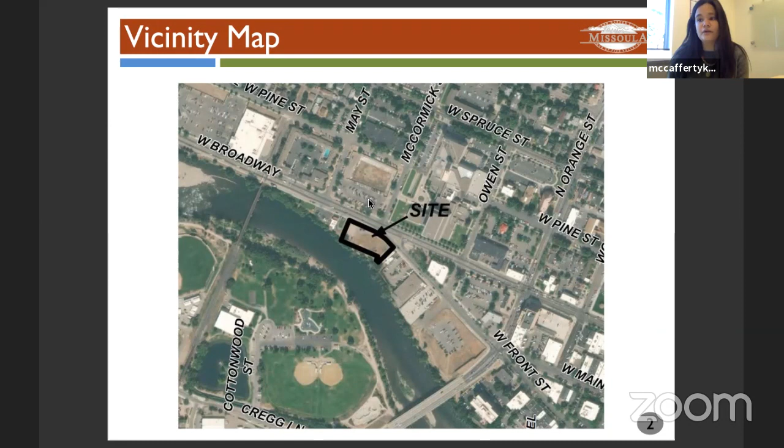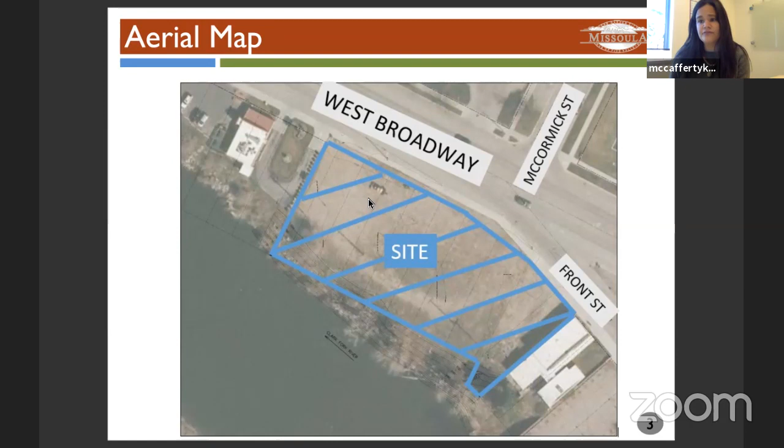Here's the location of the two parcels on West Broadway, right at the fork of West Front and West Broadway. Here's a closer aerial of the subject parcel. The property fronts West Broadway and Front Street, as well as the Clark Fork River.

This is the current zoning map. As you can see, this is the last parcel left in the Riverfront Triangle Special Zoning District. The properties adjacent to the east were rezoned from Riverfront Triangle Special District to CBD 4 Central Business District and OP1 Open Space in 2017. To the north and west of the parcel are properties zoned C1-4, neighborhood commercial, and to the south is the river and the riverfront.

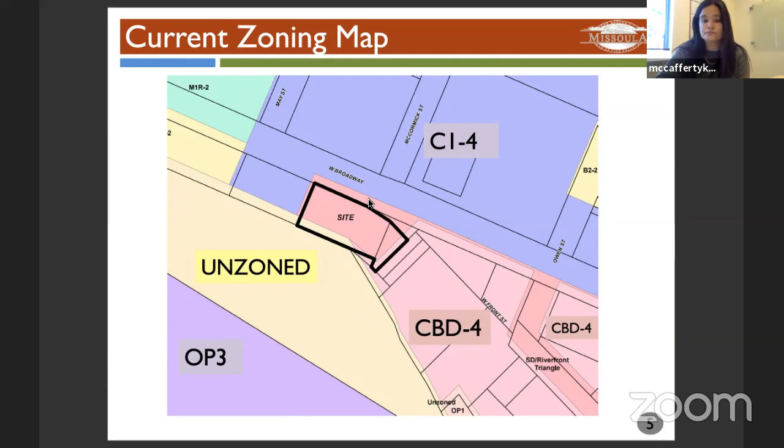The 2019 master plan brings up another aspect of this project, which is the riverfront trail easement. This downtown master plan describes the Clark Fork River in Missoula as a defining feature and recommends an extension of the riverfront trail along the north bank of the Clark Fork River and open space along the river, including the southern frontage of this subject parcel, shown on this map in this orangey brown color.

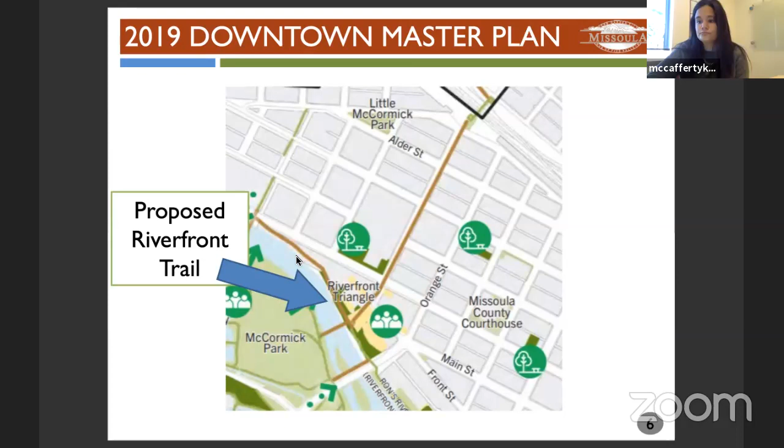This is the North Riverside Parks and Trails map. As you can see, this map also highlights a potential multi-use trail along the riverside of the subject parcel, shown in the dashed red.

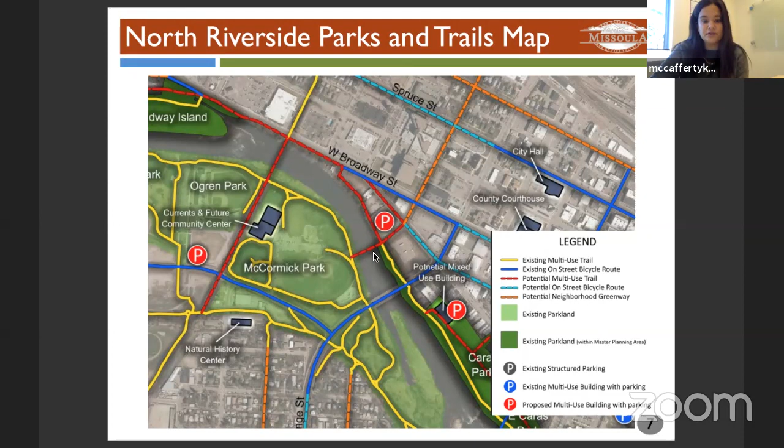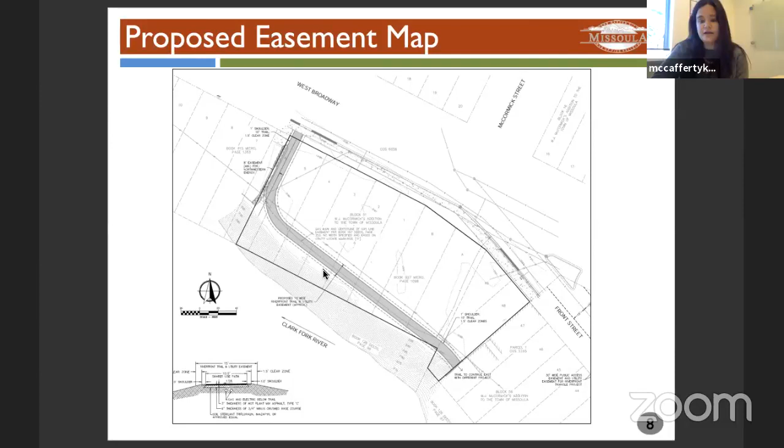The applicant's submittal packet for the rezone includes a 15-foot wide public trail easement across the subject property, shown in this gray area. It is shown running east to west, connecting to sidewalks on West Broadway at the western edge of the property. This is what the slide is showing, just this easement is proposed.

In regards to the Riverfront Trail, staff is recommending that the applicant and the City of Missoula enter into a development agreement to cover the dedication and width of the easement, as well as the construction and management of the trail. The proposed development agreement would address the following points.

First, include a 20-foot wide public non-motorized access easement filed with the development agreement. It would include construction of the Riverfront Trail along the north shore of the Clark Fork River from east to west, without interruption or detour, connecting to West Broadway on the west end.

It would state the developer's responsibility for the cost of a minimum 10-foot wide asphalt trail, and state the City of Missoula's responsibility for the cost of upsizing the trail to a 14-foot wide concrete trail, as well as repair, maintenance, and replacement.

The design of the Riverfront Trail and any variation from the standards, including easement width, surface width of the trail, lighting, provisions for trash and benches, shall be specific to the site and approved by City Parks and Rec. Finally, the development agreement shall be reviewed by City Parks, Missoula Redevelopment Agency, and Development Services, and approved by City Council.

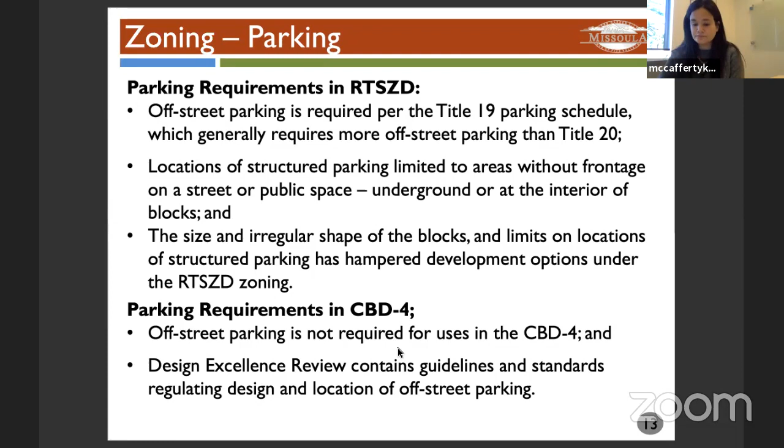In general, CBD4 Central Business District with the outer core design excellence downtown overlay zoning code provides a wider variety of commercial uses without the prescriptive requirements of the current zone. It provides a mix of permitted residential and non-residential uses, similar to the Riverfront Triangle Special Zoning District. CBD4 has an increased height to 125 feet with a step back of 10 feet above 85 feet at the street edge, compared to a maximum building height of 52 feet in the current zoning.

A 50-foot setback from the 100-year floodplain is in CBD4, however there's no requirement to extend the Riverfront Trail within the setback area, whereas in the current zoning a 50-foot setback from the top of the riverbank is required, and extension of the Riverfront Trail within the setback area is also required. Finally, there's no off-street parking requirement in CBD4, compared to the current special zoning district, which requires parking per Title 19.

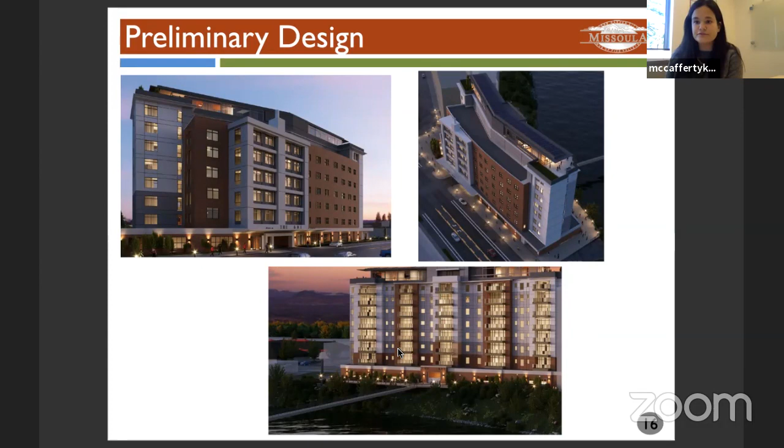Because the growth policy recommends CBD4 as a relatable zoning district for lands with this urban center land use designation. Also, the motion requiring dedication of a trail easement and development agreement are accommodating to the 2019 downtown master plan.

Public services and transportation is next. The rezoning is in an area served by public water, sewer, sidewalks, public transit, and public roads. The motion requiring the dedication of an easement and development agreement for the extension of the Riverfront Trail enhances non-motorized facilities.

Next is compatible urban growth. The rezone and easement will facilitate mixed-use development in the urban center. Next, promotes public health and safety. CBD4, the proposed zoning code, has a 50-foot setback for structures from the 100-year floodplain. And the motion requires dedication of an easement and development agreement to provide an extension of the Riverfront Trail.

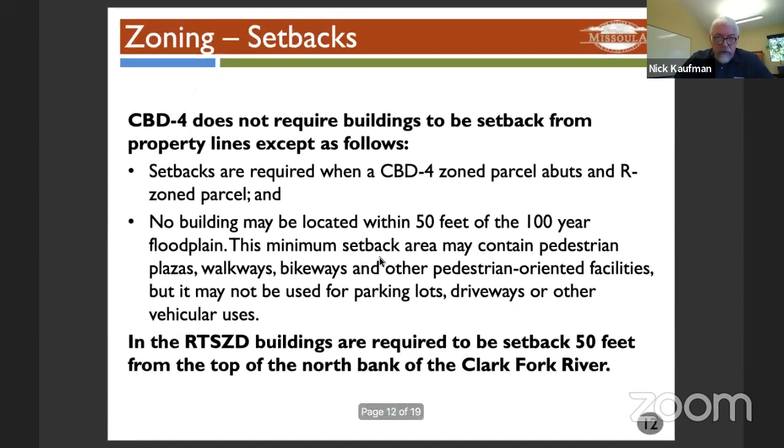Yep, I can make that change before the council presentation on the 14th. Sound good? The slide presentation does have some pretty nice renderings of what's proposed for the site, and it also shows the ground floor parking that we're going to provide.

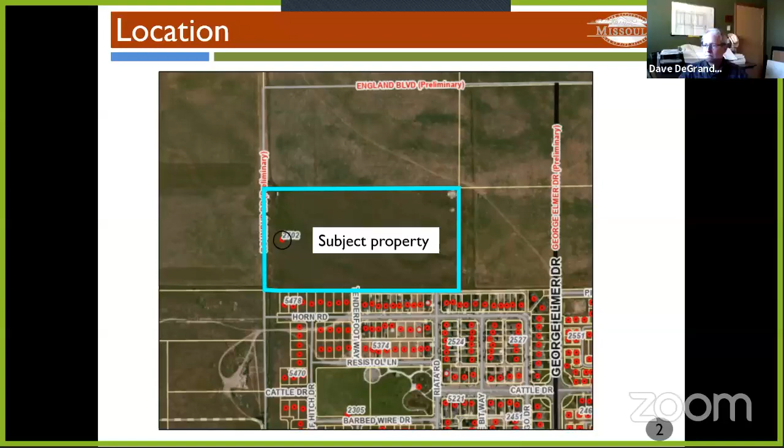Surrounding this parcel to the west is airport-owned land used for agriculture. To the north, agricultural land, and to the east, agricultural land as well, though to the east we are in the process of reviewing a subdivision application intended for multifamily and mixed-use type development. This is a rapidly growing area. The parcel has historically been used for agriculture, but according to the applicant it has been fallow for several years. It's adjacent to city limits on both the south and west side.

The parcel is located within Annexation Area A. According to the City of Missoula Annexation Policy, Annexation Area A is an area where the annexation policy guidelines are largely met. So this is an area where the city has indicated annexation will be strongly considered.

Currently, the property is zoned in the county as CRR1 rural residential. That's a not particularly dense rural residential zoning district, with 1 dwelling unit per acre as the maximum density. The proposed annexation includes a request for RT 5.4 residential, a zoning district that allows single dwelling and 2 unit dwellings.

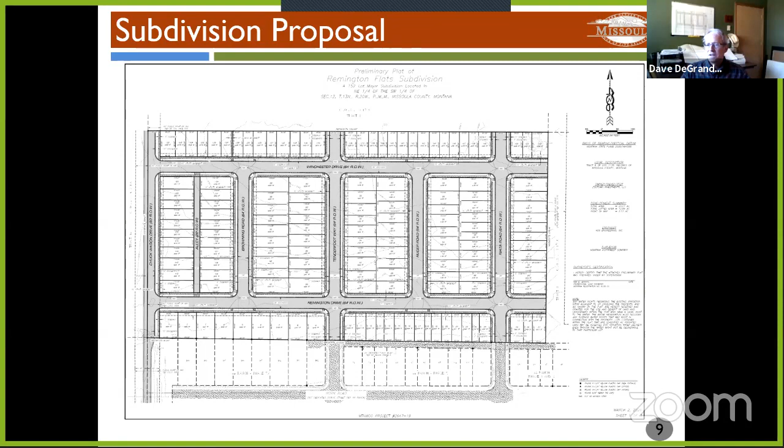There's one peculiarity that stands out in my mind about this property, in the lower left-hand corner, the southwest corner of this project. You can see in red, that's Chuck Wagon Drive. Along the 44 Ranch subdivision to the south, it actually stops about 1,000 feet short of this property. So the developer is proposing to build a temporary type road, or a portion of the roadway, and have 44 Ranch and other developers extend it. There will be contributions made by multiple developers to bring Chuck Wagon Drive up to city standards to the property.

The other peculiarity with regard to Chuck Wagon Drive is it's shown here on the western side as Roundup Drive, but it's the same thing along this property. This is a certificate of survey where the roadways for Roundup or Chuck Wagon, and also George Elmer on the east, were shown for the first time, I think, on a filed certificate of survey. They established, as you might recall from the Heron's Landing subdivision, 80-foot rights of way, so these are publicly dedicated right of way.

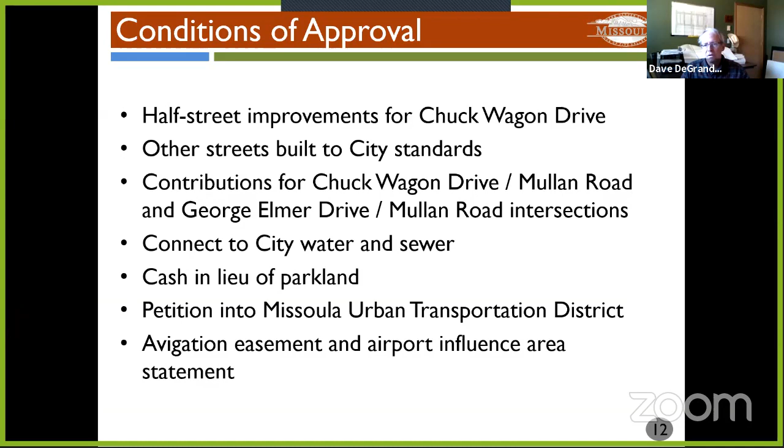What we're recommending for mitigation is that an avigation easement be provided to the airport authority. This essentially provides legal protection for future residents, alerting them that they're under a potential future airport runway, and that there will be noise they need to think about when designing and building their house. Those are the main conditions of approval, along with several other more standard ones.

Now back to the annexation and initial zoning. Montana law and City of Missoula Title 20 have certain criteria for annexations and applying initial zoning. For zoning, there are three main criteria, and it's either-or—the applicant only has to meet one. The first is that the zoning would authorize land uses comparable to those authorized under the current county zoning classification. I'd argue that's the case here: currently county zoning allows single dwelling residential development, and this zoning would allow single dwelling as well as 2 and 3 family residential development. I'd call it pretty comparable.

The second criterion is that the zoning would authorize land uses consistent with those approved by the county commissioners or board of adjustment. Again, I think that's met—we're going from county residential to city residential, which isn't too much different, just at a higher density.

Third, the new zoning must be consistent with the land use and zoning recommendations in the growth policy. As shown on the growth policy map earlier, this zoning would be consistent because it allows residential land use at an urban scale. The growth policy map mentions 3 to 11 dwelling units per acre, and the density proposed here is 7.6, which falls squarely in the middle of that designation. So it complies with the growth policy.

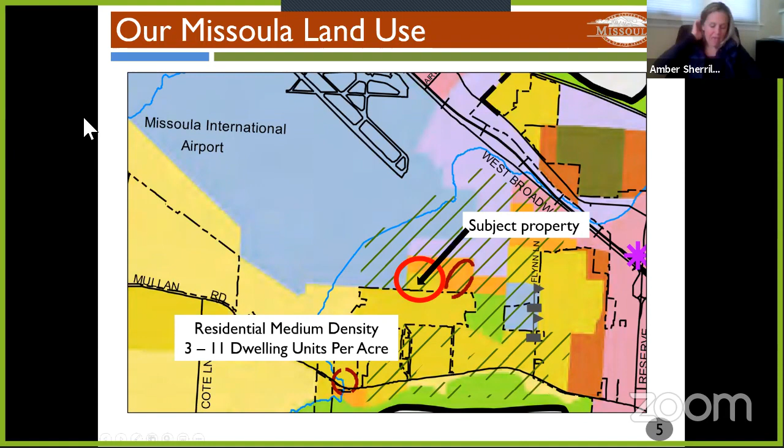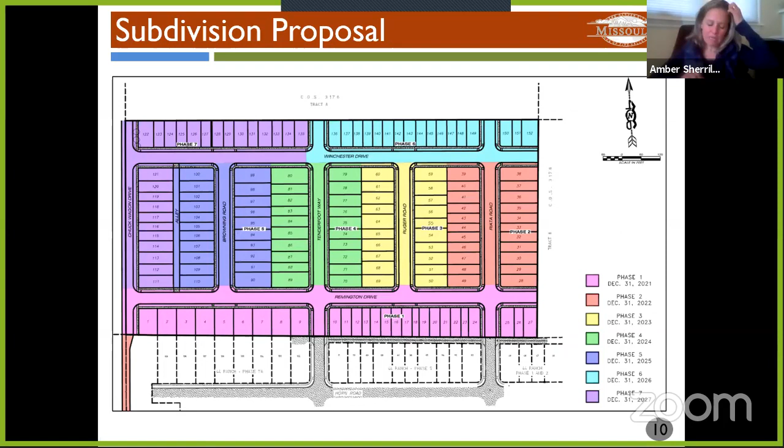And also, will you go back to the slide around the half street improvements? I don't completely understand that, I would love to understand that a little more. And then my question, as it relates to being part of the Mullan area master plan, is how does that work with through streets? I'm just worried about them all coming together, since this is happening at a time we're also trying to get that plan done. I don't even understand the half street thing.

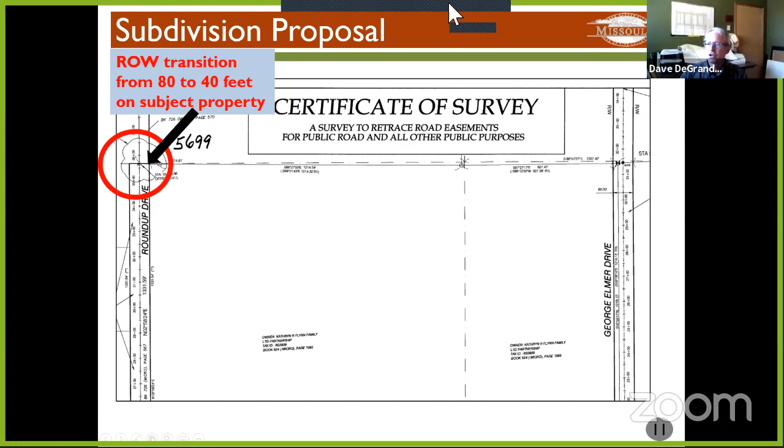All right, what I'd like to do is show you exactly what's being proposed by the developer with regard to the on-site section. But it's going to take me just a minute to pull it up. I don't have it pulled up right now, but I can get it.

Mirtha, did you have a question you want to ask while Dave's getting that information? Sure.

I have a couple of questions. One has to do with cash in lieu of parkland dedication. If we still have someone from Parks, I'd like to hear more about the rationale. I know there were significant improvements to the 44 Ranch playground, which took a lot of coordination between residents, fundraising, and working with Parks. I know the cash in lieu of parkland dedication will further improve that playground in 44 Ranch, but there's a real need for more parks and playground equipment in that area, especially as it grows. So I'm wondering why it's not being dedicated as part of this development.

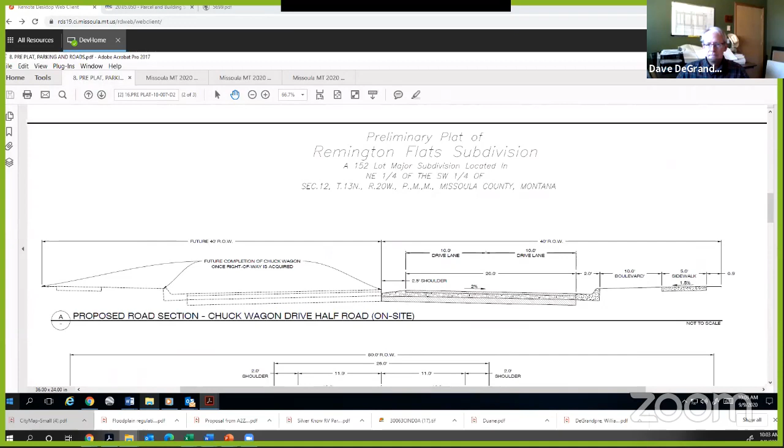Just want to add that it was Parks' preference that it be cash in lieu. Neil Miner had mentioned early on that the 44 Ranch Park was in need of improvements, and the 44 Ranch homeowners have been trying to raise money for that. So it was actually stated in our early meetings with the developer as their preference that it be cash in lieu.

And then if there's a follow-up, we can try to answer. Otherwise, I can talk about the density. I do have a follow-up, if that's okay, Heidi, about cash in lieu.

I guess I'll have to ask my questions of Parks, because I'm curious to know why that's defined as a regional park. My understanding is a regional park serves a much greater area and it's bigger in size and infrastructure. And do you know how much the cash would be for 1.43 acres?

Not at the moment, if I can answer that, Chairperson West. It's something that's determined through a certified appraisal. So it's something that happens when the developer comes in—I don't know what the value is. That hasn't been established yet. That would have to be dedicated prior to final plat filing, probably of each individual phase.

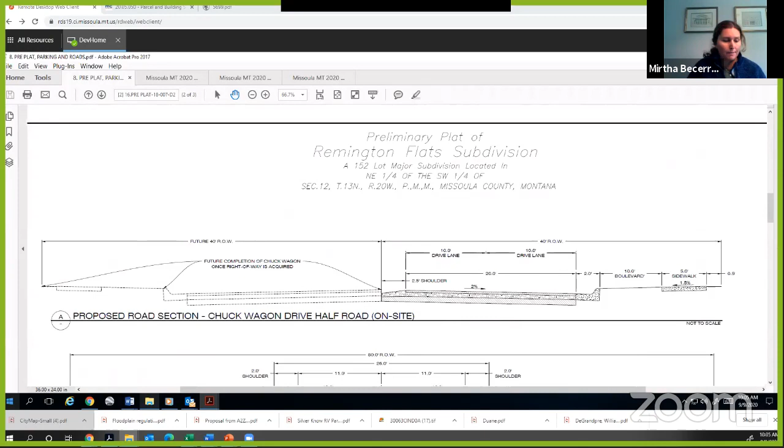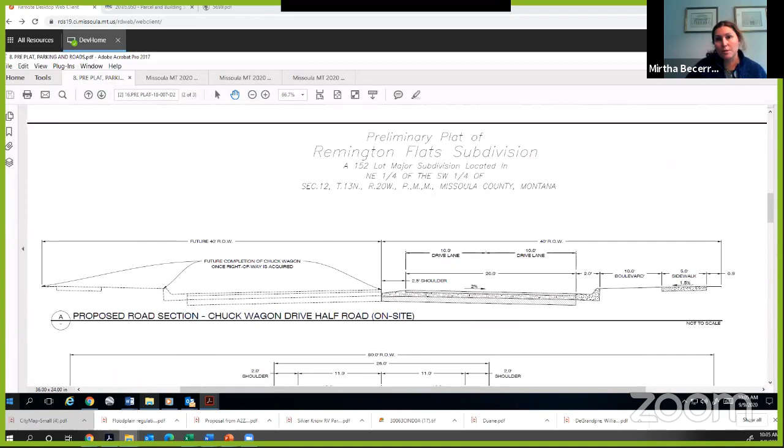Okay, thanks. Can I add one thing? I'm not sure if it's a regional park. I think it's a neighborhood park. Yeah, that's why I was surprised to hear that our city Parks and Rec department thinks it's a regional park, because from me being there, I wouldn't consider that a regional park. A neighborhood park will serve residents within a half mile walking on a sidewalk, and certainly Remington Flats, that neighborhood park would serve them.

You can check in with Neil Miner, but I know he was definitely in favor of cash in lieu. The amount too—the appraisal has to be done within 6 months of filing the final plat, and that's when they would pay the cash in lieu with each phase. So as each phase gets filed, another appraisal will be done, and it's based on the unsubdivided, unimproved land, but it certainly is based on the new zoning.

Thank you. And then I would like to get back to Amber's question, since I cut her off. So the documents pulled up, we'll get to the density too, but about the half street.

Okay, so as you can see on your screen, this shows a proposed road section, a cross section of Chuck Wagon Drive along the property. Again, there's an existing 40-foot right-of-way along the western property boundary. What usually happens is half the right-of-way is taken from the subject property, and half would be taken from the adjoining property. Right now, that's airport land, so they haven't chosen to dedicate that at this point.

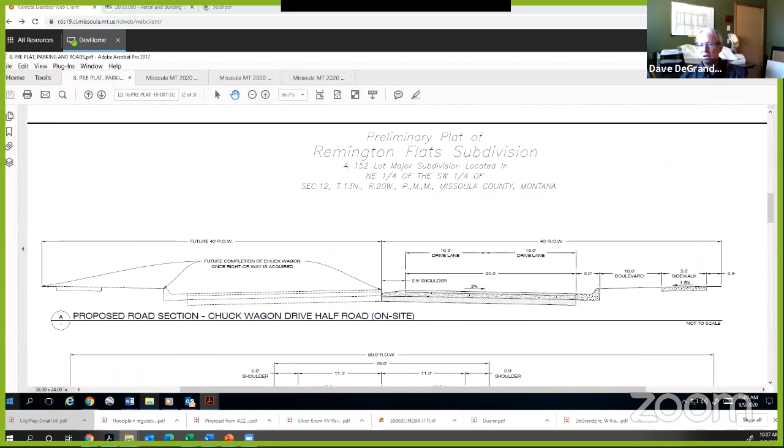The idea is to build it so it can function right now for vehicular traffic, both north and south, but then at some point in the future could be built to full collector standards, which would include essentially mirrored improvements.

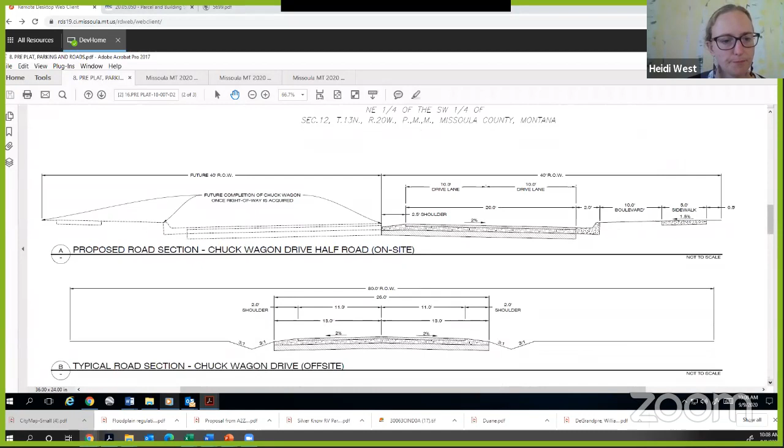Can you scroll down on your image a little bit? I don't think we can see the full description of the driving lanes. There are three different diagrams here: A is the proposed road section for Chuck Wagon on site, and B is Chuck Wagon off site, the area to the south the developer would build. It has an 80-foot right of way, but essentially the developer is proposing to build two 11-foot drive lanes with 2-foot shoulders and ditches for now. Other developers in the 44 Ranch in particular would be responsible for completing that. So this would be a piece or portion of the full road improvements, and others would contribute as well, developed out over time.

Thank you. May I have a follow-up? So to the left, what would be west, that is airport land. So in order to make that a collector street, they would have to say we can build it. I'm thinking about the future, hopefully as the Mullan area master plan comes to fruition and starts being built out. I'm wondering what it would require to make that a collector street from the airport side. Just an easement, or how does that work?

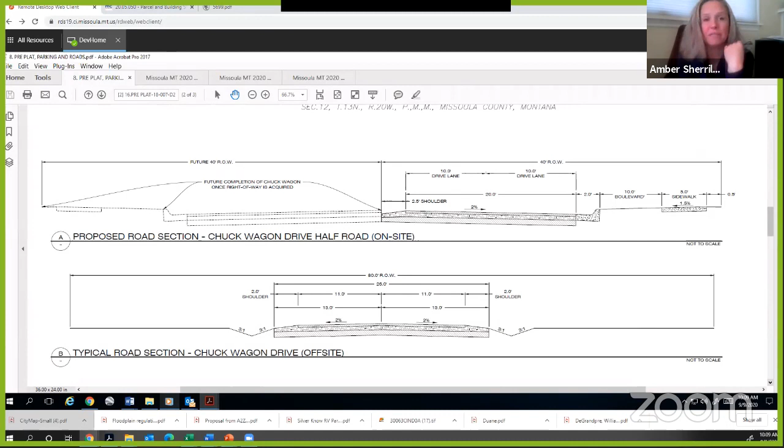It depends on what the airport wants. There are a couple of different ways to do it. If the airport ever wants to develop what they'd view as compatible development in this area, they could develop commercial or industrial uses, maybe warehousing or support facilities for the airport. Then the airport authority would build that road out and dedicate 40 feet additional right of way to the city. They've talked about that a little. We did have a meeting requested when this development was initially proposed, since they received a letter as adjacent landowners. Dill Bickles, myself, and engineering folks sat down and talked with the airport. My impression was they didn't have specific plans for the future, but that's a potential, and I think it's shown in some of their airport plan drawings or depictions.

Another possibility is for the city to negotiate and essentially purchase the 40 feet of right of way from the airport authority. I think that wouldn't be as preferential from the city's perspective—they'd rather have someone else develop the road than the city. So that's an option, and maybe eminent domain is an option as well. I don't have any idea how council would view something like that, but I know it's an option under the law. I'll just put it like that.

Thank you, that's really helpful. All right, I'd like to get an answer to Mirtha's density question, and then we'll go to Brian. So 152 lots on 20 acres is a density of 7.6 dwelling units per acre.

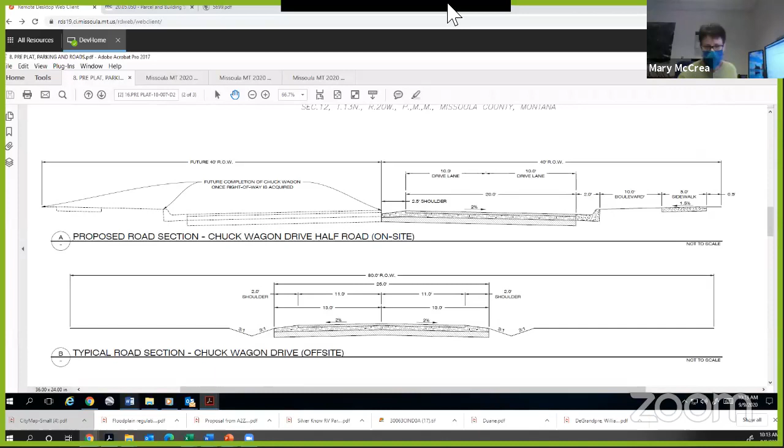I think maybe we can ask Neil to come to the public meeting, or should I follow up in between now and then? What's your preference?

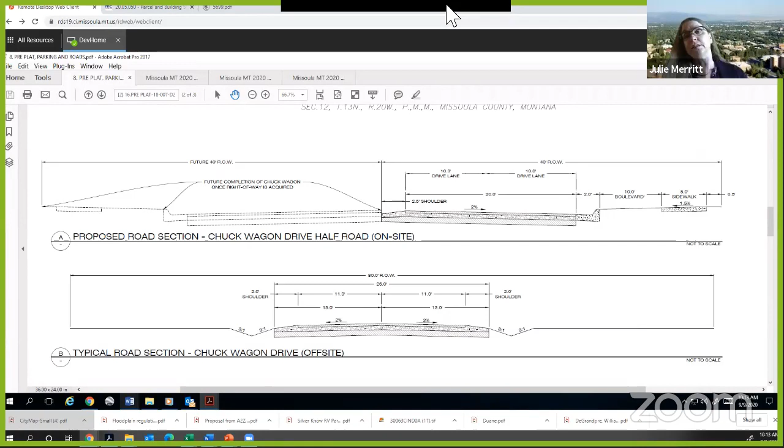The conditions of approval are not actually on the zoning request. So I guess the public hearing that we're setting is about annexation and zoning, right?

Yeah, I think we'll see this project a few more times. Mary, could you talk to the process a little bit? Yes, so today is a resolution of intent to annex, and that puts it in the city's jurisdictional ability to make decisions on this.

You will have another LUP on the rezone and subdivision, coming up on September 30th. So today, in order for City Council to take further actions, you need to pass the resolution of intent to annex. Then it goes to Planning Board on September 15th, with an LUP on the rezone and subdivision on 9/30, and a City Council public hearing.

The first public hearing's on the annexation. That's the first decision, and that is annexation and zoning upon annexation. The second decision will be on the rezone being requested to apply a neighborhood character overlay. And the third is on the subdivision itself.

Typically with annexations in the resolution of intent, we include the conditions of approval that will be for subdivision, but those will change based on your decision as it moves forward. So this is a first step for you to be able to consider all the other information.